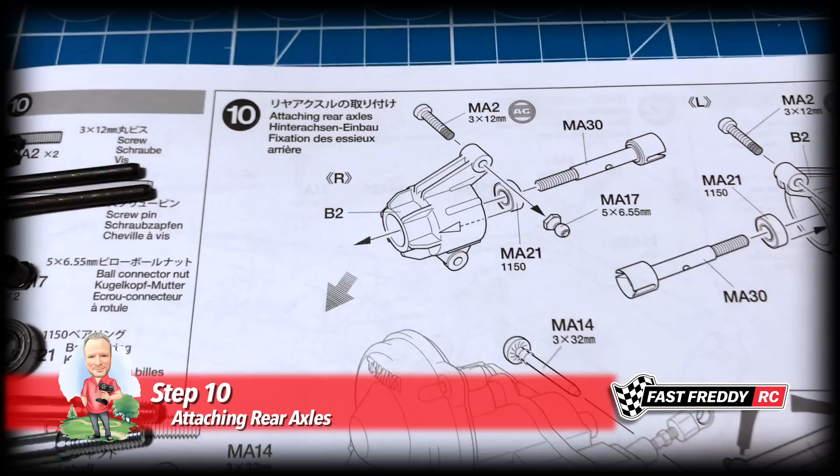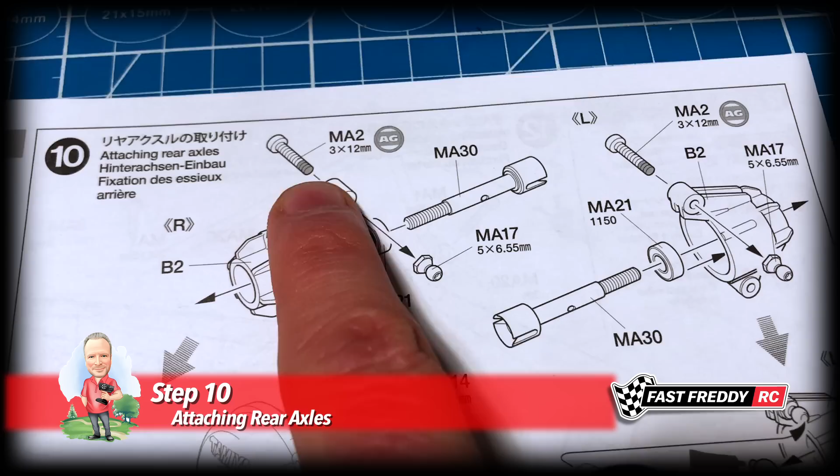So for step 10, attaching the rear axles. You can see we've got to grab these hubs, we've got bearings, and they're wanting you to use liquid thread lock again. I'm going to do it because there's no reason to ever take this off, so I don't mind using the thread lock for that.

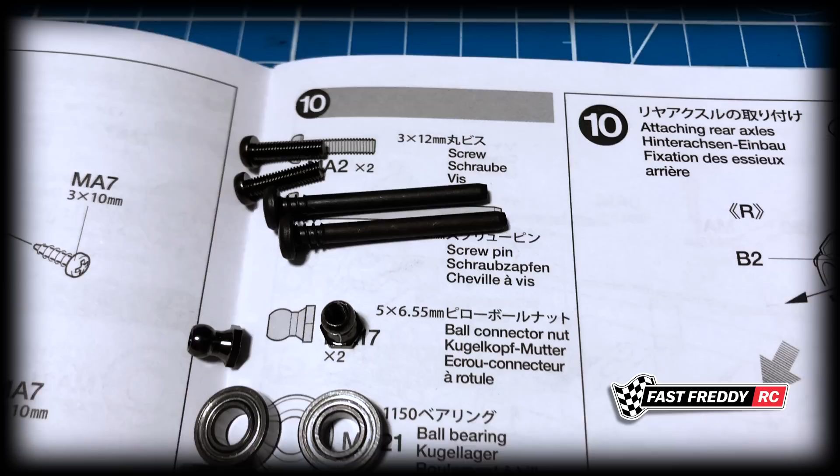We're going to attach those axles and put in the screw pins and have that all set and ready to go. So there are the screws, screw pins, ball connector nuts, ball bearings, rear wheel shafts, etc. that we need, and of course there's our hubs and our axles. So I'll set this up and we'll put it together.

So let's work on the hubs right from the start here, and let's get those connectors and the screw in place just so that that's all done. Now you can see that these are two identical pieces, the B2, so it doesn't really matter which way you do this. So we're going to be able to slide that through.

I'm going to grab my stick here, put a little bit of thread lock on the ends here, and grab the connector, and I'll spin that on. Again, we're going to end up having to screw this on, but also use the pliers to hold it in place. So we'll do that.

And there we go, so there is this side done. So on this side, it's going to be the reverse of that. We're going to stick the screw through this side and put a little bit of thread lock on here.

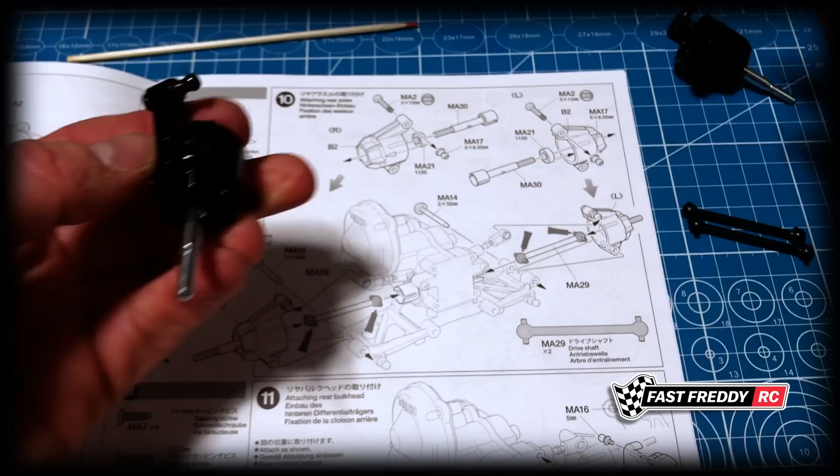You can see that we need a bearing, so we'll put that bearing down inside the hub, just like that. And then we have the axle that's got to go in on that side. Then on this one, same thing again, we've got a bearing, let's put that down there, and we've got one of our rear axle shafts to go inside of there. So there's that side.

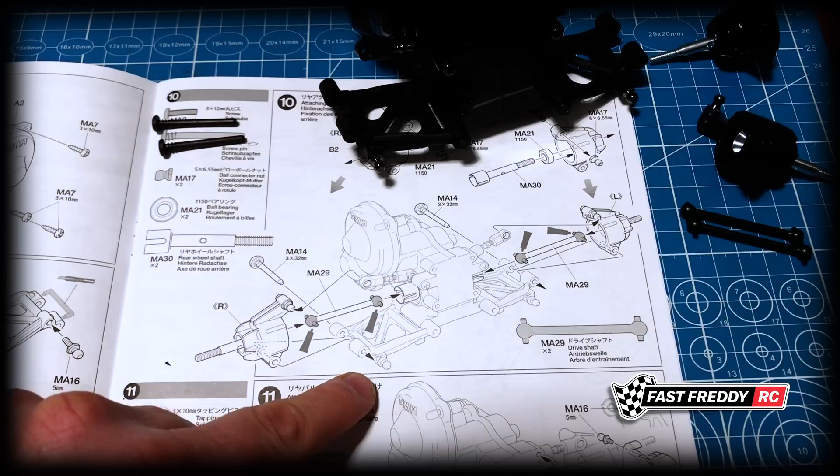So let's just put those aside like that for now, I'll move that over there. And let's grab our gearbox again. So you can see that for this side, we need to grease this up, put this in with a screw pin, and then we're going to snap on the ball connector.

Well, I think what we'll do first is let's actually get that screw pin onto the bottom. So we know that this one is the one where the ball connector is facing that way. So we're going to put a screw pin in there, slide that on to this, get that into position, push that through.

There we go, now that that's all the way through to the end, I'll grab the screwdriver and we'll screw that in all the way. So there we go, so that is how that's going to look.

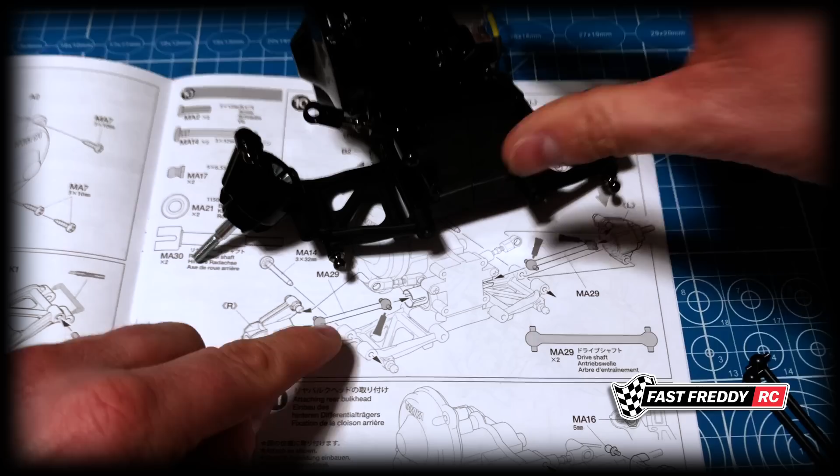So knowing that, what do we need to do? We need to grease up our drive shafts. So let's put a little bit of grease on there, put a little bit of grease on the other side. Not going to overdo it, but I'm going to make sure there's enough.

And we're going to slide that into our drive shaft, slide this side into our drive cup. Make sure that slides in all the way. Yes, there we go. And then this is going to be moved down to here, and we're going to slide that on. Now it doesn't look like that's going to work as easy, so I'm going to try and do it this way. Actually, let's do it this way.

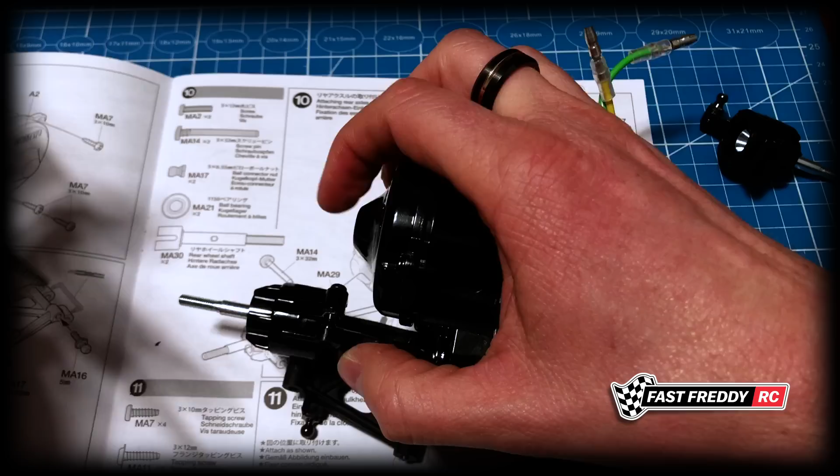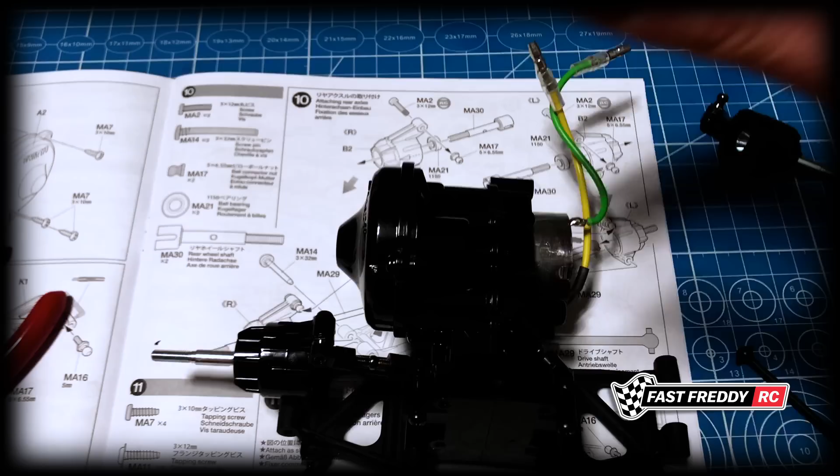Nope, that's not going to do it. Let's see if I can. Oh, there we go, it's on. It is easier with the finger than trying to use it with pliers, but it's also fairly tough. You can see the marks on my fingers. But there we go, there's one side done.

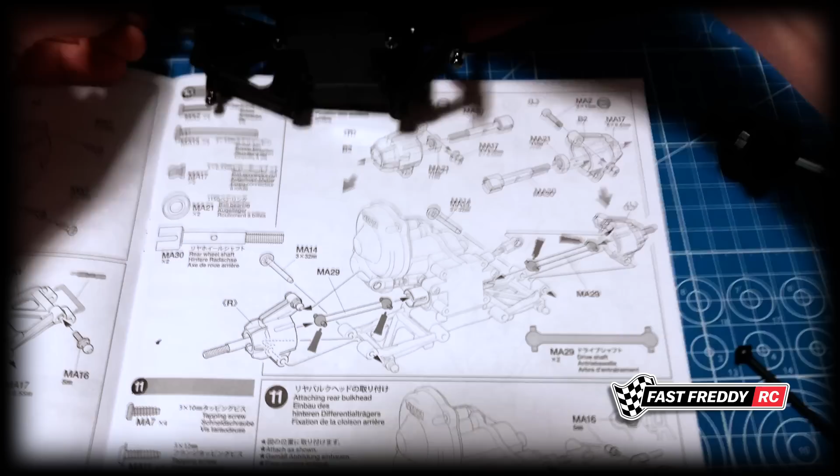So we're going to do the same thing on the other. So we need to get the screw pin in, so we'll turn that around, let's get the screw pin. Put that in at that side, push that in, slide that through. There we go, and let's screw this all the way in.

There we go, and again let's grease up our drive shaft, same on the other side. Again, not overdoing it, but putting enough on. And we'll slide that into that side, slide that into there, hold that up, move that down, and we're going to do the same thing again. Hopefully, there we go, so there is that side attached as well.

Really interesting design, just the way this is done. And obviously, because of the way the wrench is, the way this piece is done, using the wrench is going to mean you're going to be able to adjust the toe in or camber in the wheels. It'll just allow you to have some adjustment. So very, very cool.